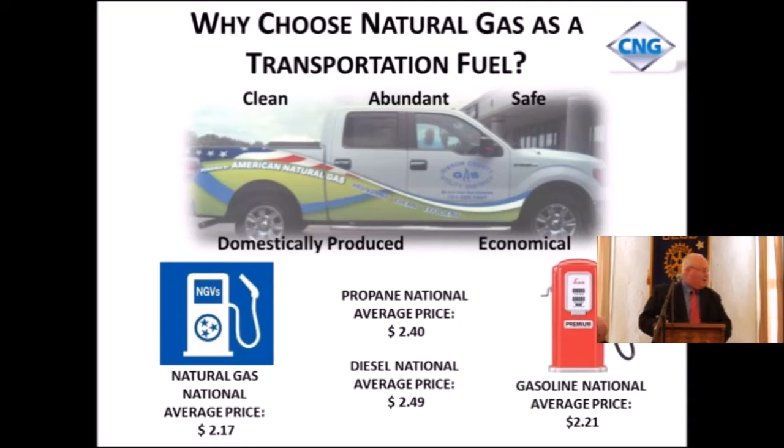There was the latest average pricing around the country we got just the other day. I was even surprised, but we're still a little cheaper than gasoline even today. So what's going on? There's my truck out, parked out front. If y'all want to take a drive like Philip did, ain't kidding, we did do 95.

Here's a picture of all the interstate pipelines in America. These carry natural gas. Most people haven't seen a map like this. You got 2.4 million miles of natural gas pipelines. Put that in perspective, we got 2.6 million miles of paved roads. We got almost as much pipe in the ground as we do paved roads, just to give you how much we got. The infrastructure's here. They're all tied together, there's no problem moving gas around anywhere. It's already here, and pipelines are one of the safest forms of moving a product there is in America.

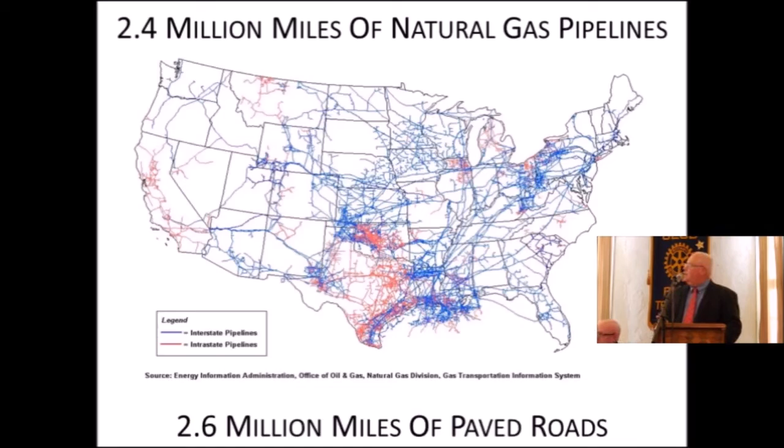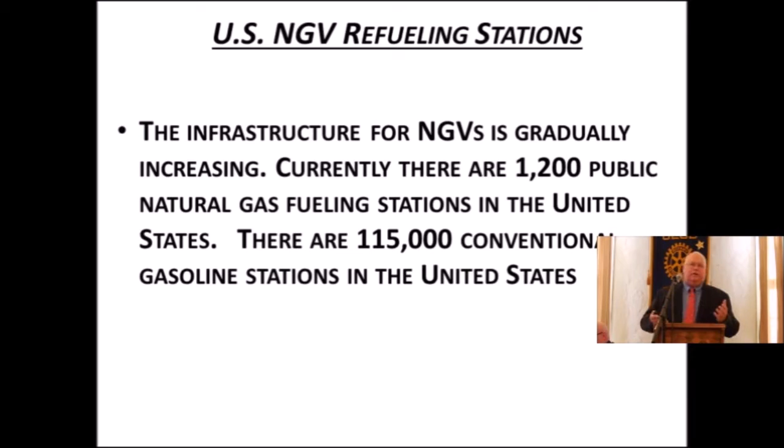Currently there's 1,200 public natural gas fueling stations in America, and just to show you where we need to go, there's 115,000 gasoline stations in America. I look for it as a transformation in transportation that's going through right now.

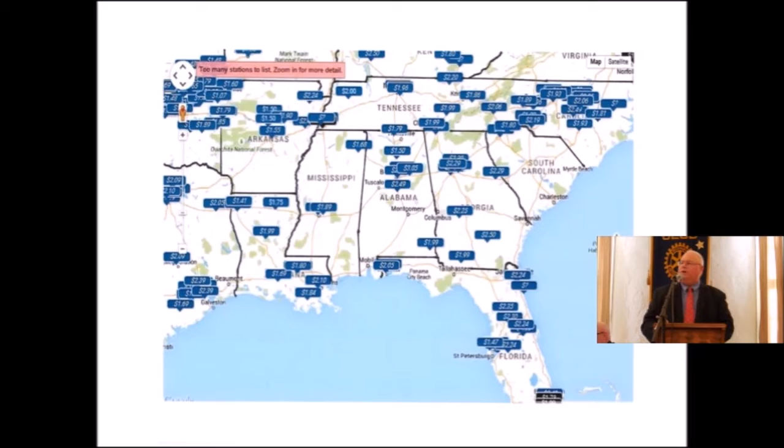Now this is an interesting map. See every one of those little blue rectangles? That represents the natural gas refueling stations open to the public right now today. There's 11 in Tennessee. I get in my truck in Trenton, I can drive all the way to Gatlinburg. Sevier County Utility just opened the station two years ago. I fill up there and come all the way back. I get 400 miles on a 22-gallon tank.

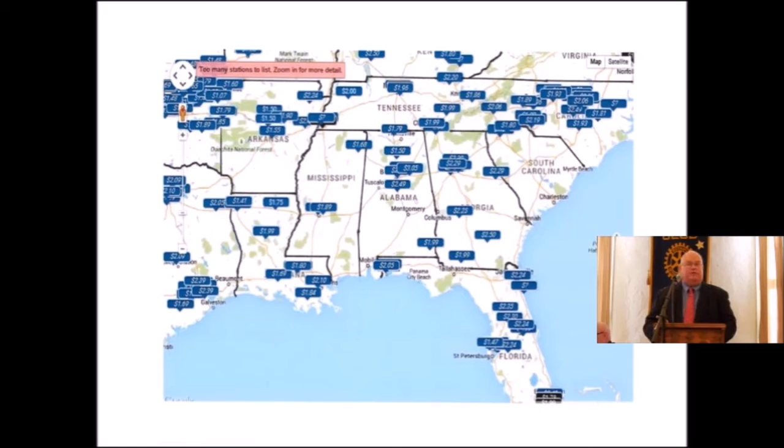I get 400 miles on my 22-gallon gasoline tank. I got an 800-mile range on my truck. But we don't drive on gasoline if we don't want to, we don't have to. But the gasoline's there in case I do need to get to the next station. You look at them and they're everywhere, and there's more coming. There'll be 5 more in Tennessee in another year.

CNG vehicles are expected to grow from about 170,000, which is about where we said we are now, to more than 500,000 by 2020. That's just a few years, shows you the breadth of how this is going. It's a 17% annual growth. So the demand will rise from 100 billion cubic feet of natural gas to more than 250 billion cubic feet by 2020. That sounds like a lot, but we got way more than that. That's not going to be a problem.

The estimate used to be 120 years, but now it looks like it's about 200 years. And that's not even talking about methane hydrates, and I'm not going to go into a lot with that. Just know that there are methane hydrates off every coastal shore in the world. Japan is looking at harvesting some of that right now to help their energy needs over there since they've had so much trouble with nuclear. It is frozen natural gas right off the coastline, and it's a different way of harvesting it, but you can harvest it and put it in pipelines.

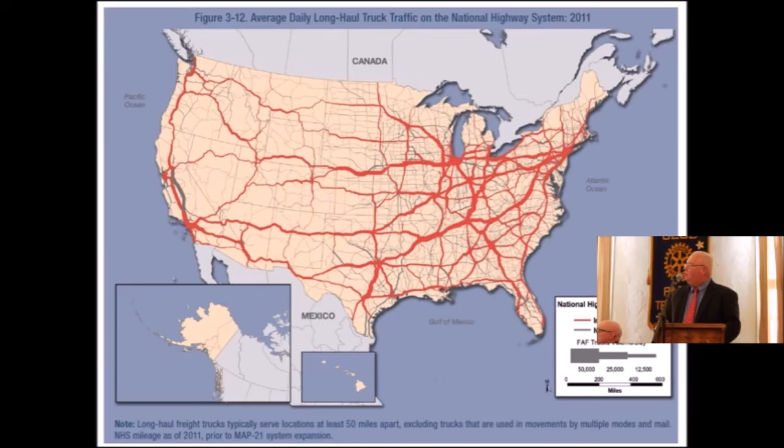Here's some slides I got from a TDOT presentation back in February at an environmental conference I was at in Kingsport. This is our highway system now, talking about how many long-haul trucks we have. See how much thicker the line's gotten? They're saying there's 35,000 long-haul trucks a day on I-40, and by 2040 there's going to be 50,000 long-haul trucks a day.

50,000. There's going to be about 3 million more people in Tennessee. What does that mean? That means apartments, houses, cars, jobs, buying clothes, everything it takes to sustain somebody's life. What does America run on? We run on trucks. That's how everything comes to you today. So that's going to have to meet the need of the growing population here in Tennessee.

So you get over on the diesel side of things and all the pollution that it causes. Well, that's why you have UPS.

They just ordered 1,400 more trucks. I've got another slide here in a minute and I'm going to show you. But these big trucking firms, and Cummins engines that build engines, are going to run on one of these trucks that can run across the country on natural gas.

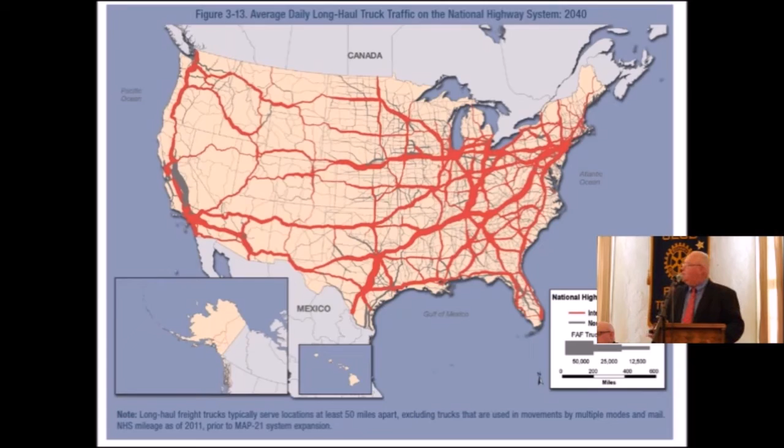Number one, it's a benefit for the environment. Number two, it's American fuel. But what they also realized is that a gallon of compressed natural gas is a lot lighter than a gallon of diesel. The weight differential means you can haul more beer. Is that something to be proud of? Okay, that's what I thought.

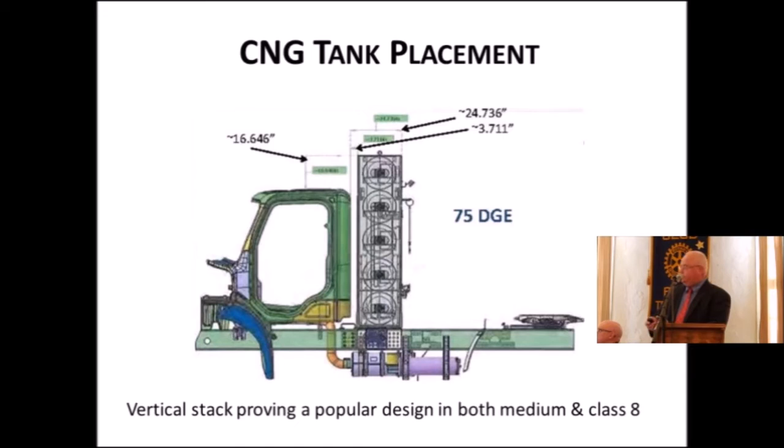And then we have the electric generation. How many people know that down in Memphis right now the New Allen steam plant is being converted over to natural gas? And I think the new Johnsonville one as well. It's happening all over the valley, it's happening around the country. In fact, right now if you look at the nation, about 55% of your electricity is being generated by natural gas. Most people might not know that.

TVA is moving from 36% to 42%. It's to meet the environmental mandates coming out of Washington. So it's clean, it's making your electricity, and electricity is what has our lights on today and this power plant going.

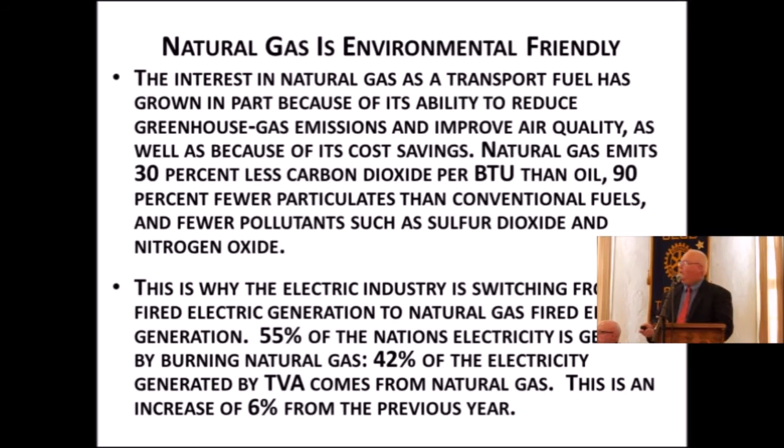The people that helped build our station, who we contracted with, is Midwest Energy Solutions out of Kansas City, Missouri. Wonderful people to work with. They enjoyed the challenge of building a green station, the only one they knew of that they'd ever seen. And I will tout it: it's not only the greenest in Tennessee, but possibly the nation, because we've gotten that kind of attention.

You should have seen me getting out of the bucket truck, I couldn't get my other foot out. But anyway, it's a joke, y'all. Come on, work with it.

We just took delivery of 4 more trucks the other day. We got 14 out of 25. They're primarily run on compressed natural gas.

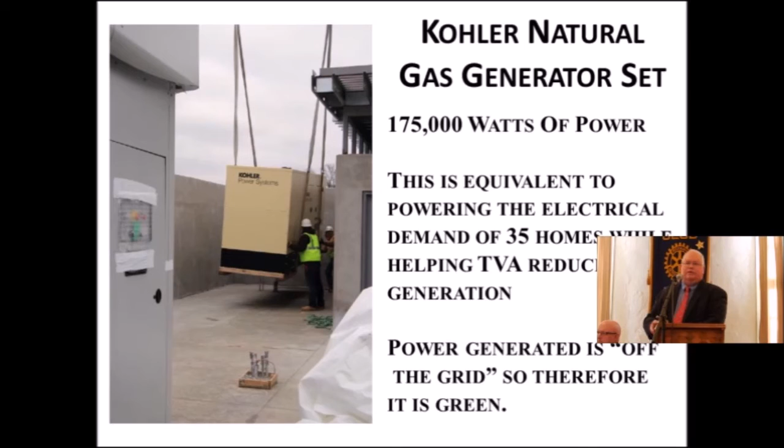There is a project underway right now. It's been going on 5 years. I don't know exactly when they're going to break ground, but they're not too far from it. They're going to take wind power from Guymon, Oklahoma, and transmit it all the way back to North Shelby County to a substation there to get it back on the TVA grid. It's going to run on DC power, which means less resistance in the lines, but it's a $2 billion project. It just shows how serious they are about this environmental effort and trying to generate power.

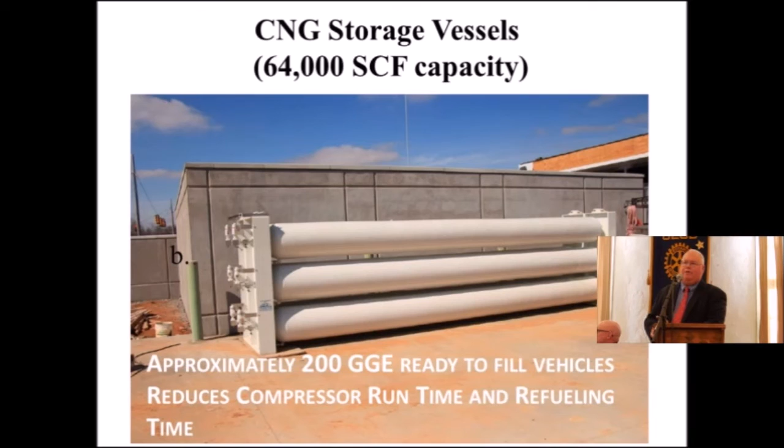These are our storage tubes. They're much like the gasoline storage tanks on the pumps. That's where we store our gas, so that when you pull the dispenser out and put it in your car, then you pull the trigger, that's where it comes from.

You put it on, you hit the handle. The handle does a quick connect, grips hold of the tank, the little nozzle for the tank, and you go over and flip the handle up on the dispenser and it pumps the gas in. When it gets through, you're through, you take it off.

I don't have enough time to show you all the videos, but they drop test these tanks in the back of cars like this from 90 feet, 100 feet, 120 feet in the air, fully loaded, nothing's happened. They froze them, they put dynamite on them, they shot them, nothing's happened. The tanks are more secure than the gasoline tank you have on your vehicle today.

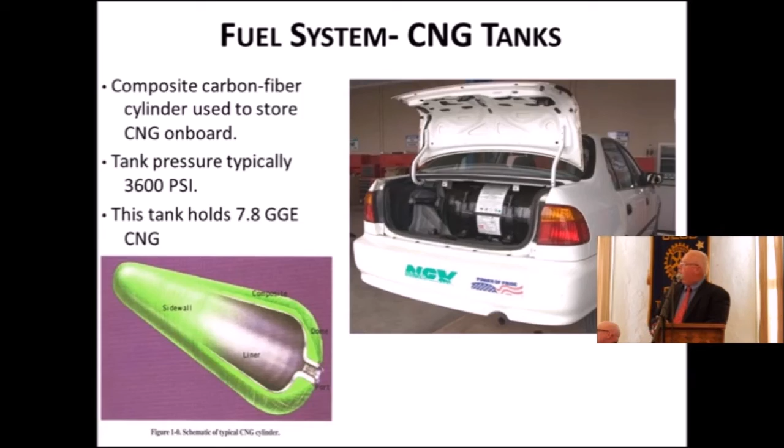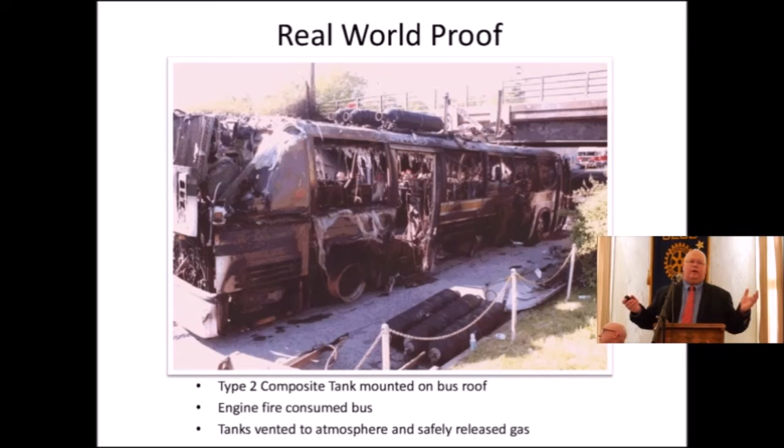Now, here's real world proof. Here's a bus that caught on fire, totally engulfed. It was because of the engine, and the engine did run on natural gas, but you see the tanks on top? Nothing happened to them. Totally engulfed and nothing happened to the tanks. What happens is, if the temperature does get hot enough, they have a pressure relief device and it'll release to atmosphere, but it's at such high pressure it's going to go straight to atmosphere. It's not going to be like in this room right here where it can have a chance for an explosive mixture.

In May, I generated a CNG rally across Tennessee. We started in Memphis, they had the grand opening of their second station. We came to Trenton the next day, had the grand opening of our station. Went to Nashville, then we went to Athens, Tennessee, ended up in Sevier County. The whole thing was a publicity media event. I was interviewed by 3 major television stations, 8 newspapers. We figured we reached over 2 million people.

I'm also on the American Public Gas Association board. I run their NGV committee out of Washington. I'm in the process of trying to generate a national rally right now. And there's NGV America, another group I'm working with that made mention of our Tennessee rally.